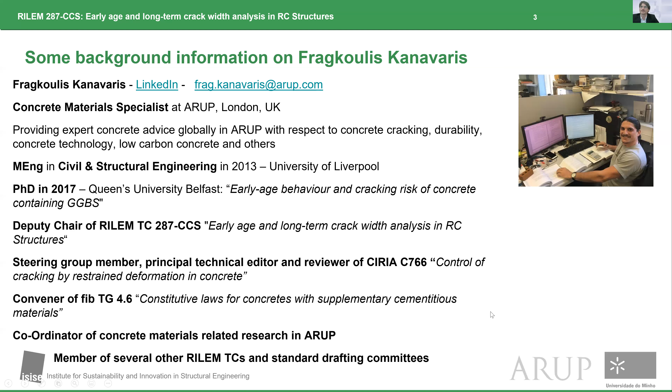We all know that cement will have an exothermal hydration reaction, and it will generate an increase in temperatures within concrete. These temperatures will generate expansion, and this expansion will cause stresses, even if not externally restrained - internal restraints will take care of that. So this is one complexity that we often not necessarily overlook, but simplify.

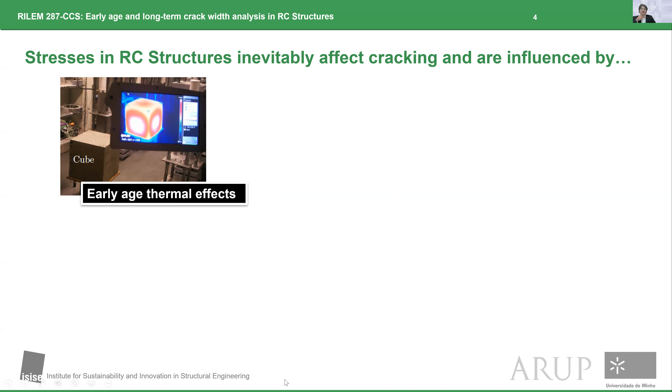Another complexity is the inherent non-uniform nature of drying shrinkage. So concrete, as it starts to dry, there will be an evaporation process from the actual concrete towards the environment. This drying is progressive from the surface to inside, and this progression will clearly cause a non-uniform way of contracting for the concrete due to drying.

So it will cause internal stresses. These internal stresses are usually accounted for in a simplified manner, but they are complex, and these simplified manners may not always be up to the challenge of representing reality.

On top of that, we all know that concrete endures creep and relaxation, and deformations are affected by this phenomena, which are also responsible not only for widening cracks in the long run, but also for alleviating the restraint to deformation. So there are counteracting effects sometimes, and they are really complex.

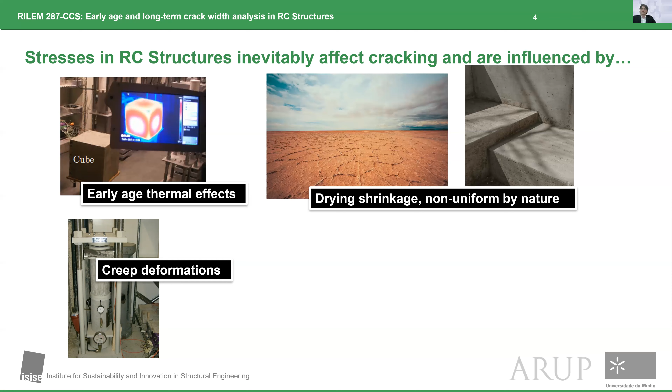They are time dependent. They are cumulative effects throughout time. They depend on the history, and the superposition of effects is often not applicable. So again, adding to the complexity.

Of course, in the middle of that, the applied loads, which are the classical things that we take into account in engineering for dozens or several decades, but they are there, and they can be really complex as well.

And finally, what I've been discussing and saying often, but now I explicitly mention it: the restraint to the imposed deformations in general. So these expansions and contractions due to the early age thermal effects, due to the drying shrinkage that is non-uniform, all this intricate stress development will have a conditioning factor on how the cracks arise, how the patterns arise.

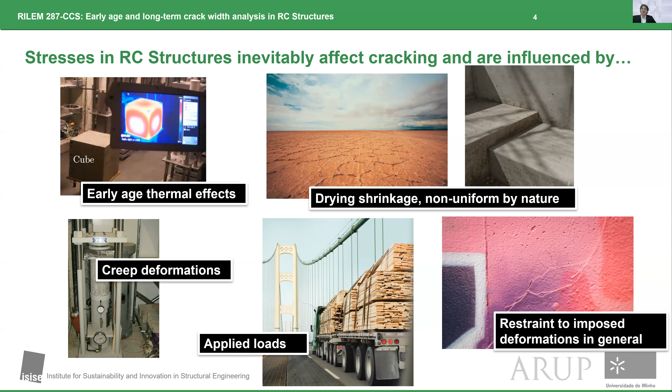So it's never a single effect or cause - we need to take this into account as a combination. And this combination is really hard to come by. So this is one of the things that we will be addressing when we discuss the goals of our technical committee.

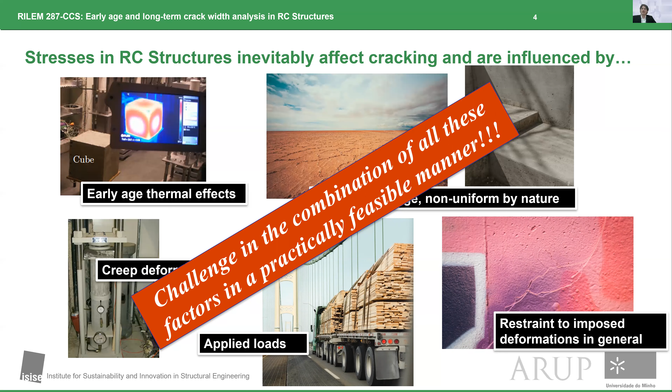So we have a legacy of a previous RILEM technical committee on thermal cracking, as I mentioned before. It was chaired by Eduardo Fairbairn, a very good friend from Brazil, and co-chaired by me. This was active between 2013 and 2019. It has 43 very active members.

We traveled a lot, much before COVID - really different reality. It seems like a lifetime ago anyway. We traveled a lot, we met very many times. We actually introduced for the first time the online meetings idea within RILEM, so when COVID came, we were already used to having Zoom meetings or video conference meetings. But anyway, it's not the same thing. We are really looking forward to getting out again, and we hope this will happen soon.

To stop speaking about the usual stuff, we made a very interesting book, in my opinion, and even though I'm very suspicious as an editor, those that find this topic interesting, I think they will find a lot of information. This book was about thermal cracking, but it was mostly about thermal cracking avoidance - it was not actually much about the actual prediction of the thermal crack width.

So this will be the subject matter of the next TC that we are now chairing. However, at the end of this RILEM TC, not only did we create this book, but we also started a very interesting document, the RILEM recommendations on thermo-chemo-mechanical modeling of massive concrete. This is aimed to provide guidelines to academics and designers on how to choose parameters and the type of modeling for simulating these complicated things in mass concrete.

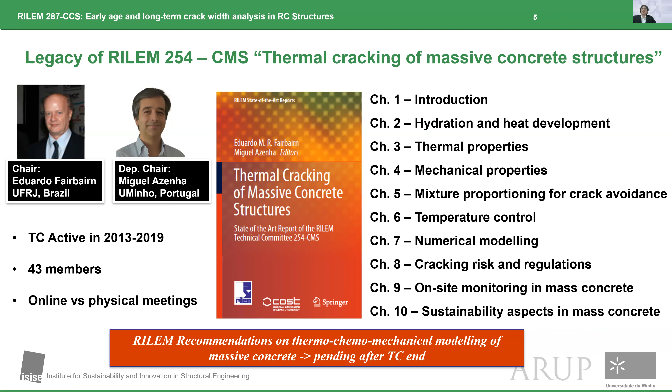The other thing I mentioned before was really important for the networking we were making, and it still echoes today: Cost Action TU1404. The website is still on, and there were several meetings and training events, which I'll speak about, as well as several short-term scientific missions. This is actually one of the ways I met Fragkoulis—he came to Portugal for a short mission as well. And there were many reverberations from it.

Its name was, as I mentioned before, 'Towards the Next Generation of Standards for Service Life of Cement-Based Materials and Structures.' We had the objective of contributing to the development of a new generation of guidelines and recommendations. Our methodology was to integrate recent developments in experimental and numerical approaches, with particular focus on the performance of concrete since early ages.

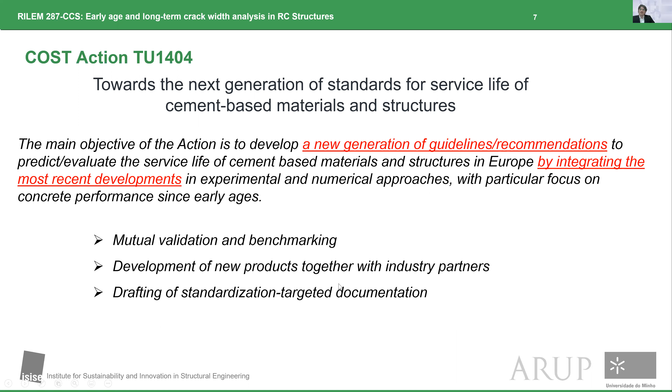We used three main sets of tools. First, mutual validation and benchmarking, both on the experimental and numerical side. We tried to promote the development of new products together with industry partners—trust me, this was really hard. And we tried to assist in the drafting of standardization-targeted documentation. We made pretty much progress on this, but much is still to be done, of course.

It's interesting to mention the three main focuses of the action. We had round robin testing—to our best knowledge, the biggest round robin testing in the world for concrete, sharing many tons of material. I'll give a number in one of the next slides. We made very careful protocols on how the testing should be done, and this was a legacy we're still using today, a reverberation—to get repeatable results between different labs, so we know we're discussing the same thing.

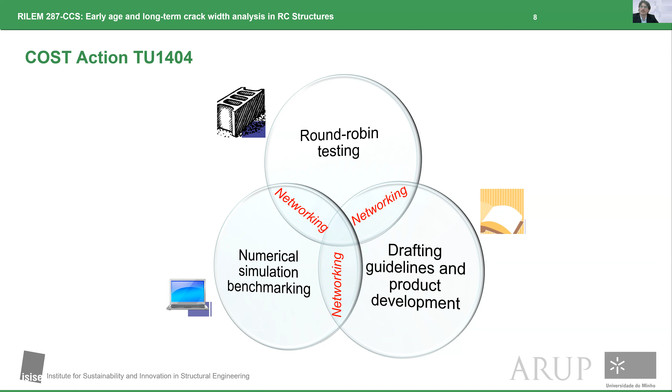We made several numerical simulation benchmarking efforts, where different experts from different parts of the world—not only Europe—tried to simulate the same thing and get somewhere. I'll speak about that as well. We also contributed a little to drafting guidelines and product development, but this was the least successful of the three. All of this was about networking, of course.

The round robin testing was, as I said, the largest so far as we know. We actually traveled 110 tons of material. This has a toll on sustainability, but it was definitely important to learn a lot from it. 43 laboratories were involved, and this document, already from 2016, was the protocol we created. It's available online on the TU1404 website—for laboratory protocols, we really think it's a very good document for concrete, mortar, and even cement-based materials.

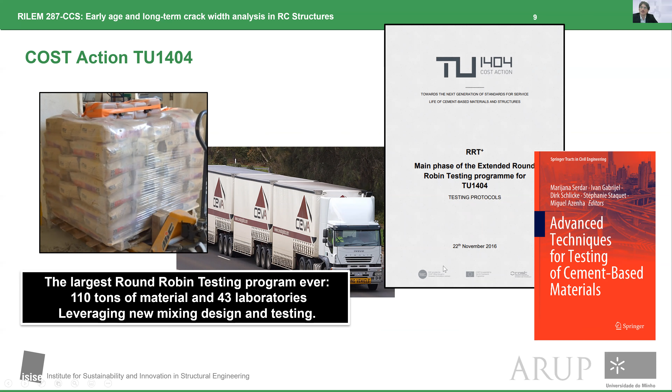We created several publications, one of those from Springer, but I'll keep going since that's not the main topic today. Of interest for today is that there was a very strong numerical benchmark activity among groups that were working separately, and we started joining our efforts to simulate the same thing with different models. Much of this was also related to the onset of cracking, or cracking itself.

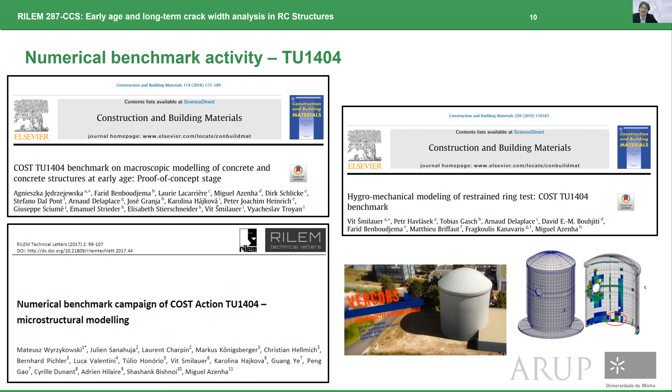We made a benchmarking on concrete structures at early age. We made a benchmarking about the ring test, an experiment that had been made in the round robin program. We made benchmarkings on microstructural modeling as well. And we contributed strongly to the benchmarking of the VERCORS benchmarking program from Électricité de France, EDF.

And then in 2017, also a very interesting doctoral school, actually by our friend at the time named Agnieszka Jędrzejewska, and she was the leader of such process. It was really nice to see the number of people that were there to learn about the modeling. The first one was about experiments and the second about modeling, but always with a similar focus, which was the reinforced concrete structures.

So the RILEM TC on early age and long-term crack width analysis in RC structures came along because of the insufficient maturity of currently existing practices for serviceability limit state design. In fact, we noticed that in many situations, and this is a practice we are noticing all along, there's an inadequate service life operation, even cracking, when codes are strictly followed. Not always, but there are many situations that are sort of unexplainable, and this goes against the predictability that we want from our codes.

Also, we are getting new materials every day. The challenges of sustainability to the world are getting stronger and stronger, and we have to cope with the capacity to bring these new materials to our concrete structures. As Fragkoulis was mentioning before, we have this challenge of supplementary cementitious materials, for example. We need new constitutive laws for them. We need to describe their behavior in a very smart way, but we are not able to do it. So how to tackle this challenge?

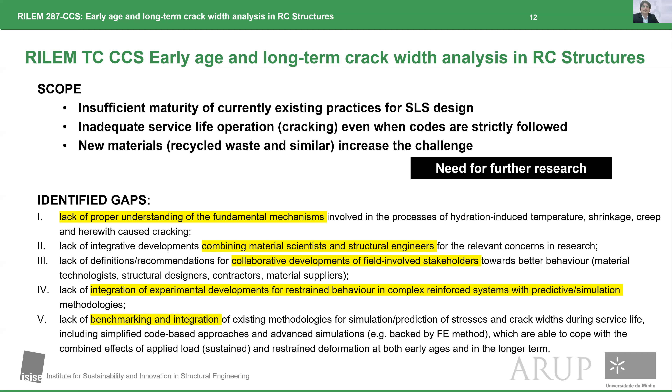This is really difficult, so we identified these gaps. They are again noted in the bottom part of the slide, but we started this TC and gathered a lot of people interested. So I now invite Fragkoulis. I will go to the next slide and you will take over the rest of the presentation. Thank you.

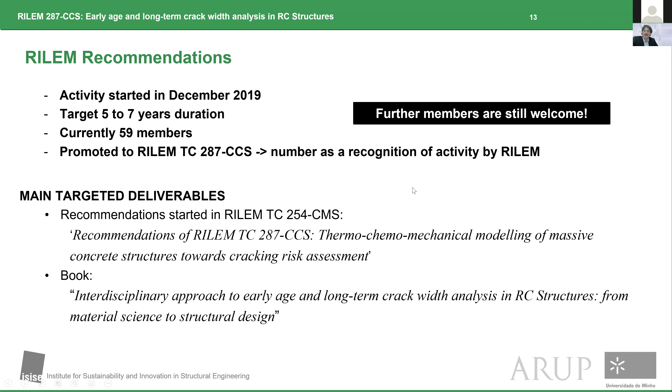Now we'll move to the next slide. So the first outcome of the committee was the publication of the recommendations document in Materials and Structures, RILEM's flagship journal, and this was completed in 2021.

It was a great milestone to see, because to our knowledge, there hasn't been a recommendations document as official as a RILEM recommendations document, solely on numerical aspects, particularly for thermo-chemo-mechanical modeling of massive concrete structures, but it could be for any concrete structure in particular.

We many times come across challenges that we don't know how to overcome: which model to use, what coefficient of thermal expansion to use, what should I do with the reinforcement, what is the thermal conductivity of this and that, what creep model I should be considering, and so on. Because we faced those problems during our development as crack control experts, we always wished for a document that would serve exactly that purpose, give us guidance on these aspects, and this is what this document is doing. I'm sure many of you will find it very useful, and it's also, I believe, open access.

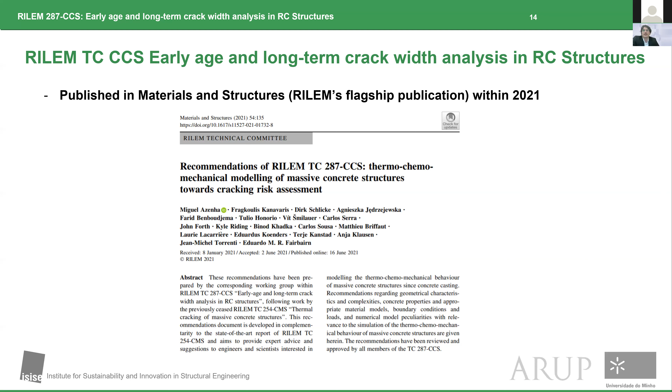Further on, sorry, I have some delay in changing the slides.

Okay, so in terms of meetings, we're an online-based committee given the current circumstances with COVID-19. That doesn't mean that the productivity of the committee has dropped; actually, it is very good. It is the social component that we miss.

But we have done already 5 meetings, and even this year we were able to organize a dedicated conference in the committee during the RILEM Spring Convention, where we have great participation of people from academia and industry expressing their views and their findings, research-wise and design-wise, on early age and long-term crack width control in reinforced concrete structures.

The proceedings of the conference are available through Springer and can be accessed. So that was another milestone for the technical committee, also very useful for us to perpetuate the pace we were having, and to shape the future of the committee research-wise, and what we should be targeting.

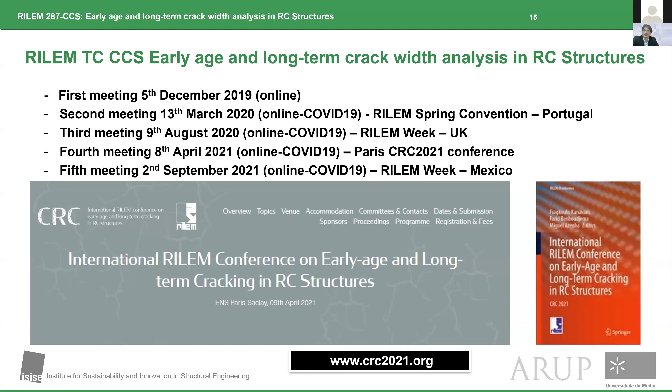So going into the specifics of the RILEM TC CCS, we essentially have now certain work packages which will be translated into book chapters, and all of them look at the distinct themes that are associated with cracking and crack control. I will go through them one by one as fast as I can, given the time limitations.

So initially, we start with an introduction and what is the cause of cracking and some terminology. Then we talk about experimental results in the laboratory. Then we move on for in situ evidence of cracking. We review the code-based approaches. We review the non-code-based approaches. We talk about

numerical simulations at multi-scales, and we challenge and critique the cracking performance requirements in different parts of the world. We review the materials techniques that can be employed to improve cracking performance and cracking resistance. And we also explore the integrated measures on the supply chain towards better cracking performance overall.

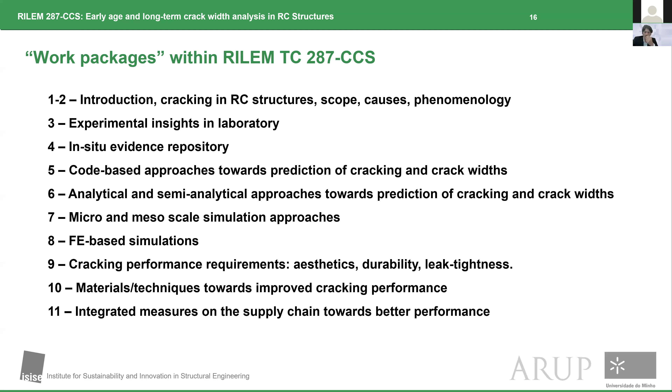So I will go one by one and try to describe the scope of each work package, and perhaps accentuate the importance of each one of them.

So in terms of relevance and phenomenology, which is the first two work packages of the RILEM TC CCS, we do know, as Miguel said previously, that cracking occurs due to several reasons. But in this case, we are particularly interested in restrained imposed deformations, which is relevant to SLS cracking. This can be due to heat of hydration, long-term temperature changes, drying and autogenous shrinkage and creep, and also the effects of restraints themselves.

These are often, or most of the time, superimposed with loads, so we have load-induced cracking also. The particular focus of the TC is how to calculate and how to control the crack widths on site. So we want to combine these two effects that traditionally have been treated differently and separately, throughout the life of the concrete since the beginning, since casting. So the time scales are from early ages till the end of service life, and that encompasses all the different mechanisms and phenomena associated with cracking.

Now, at this point, we are excluding several phenomena that lead to cracking: particular loading situations related to fire and cryogenic temperatures, extreme loading due to earthquake or impact and blasting and fatigue, any deleterious swelling reactions like ASR and delayed ettringite formation, or rebar corrosion, and cracking that occurs before setting or at the time of setting, while concrete is still probably a little bit more fluid, like plastic shrinkage, plastic settlement, and crazing. This is because there are fundamental differences between the cracking mechanisms and drivers for cracking between the imposed deformations and load-induced cracking versus the aforementioned phenomena.

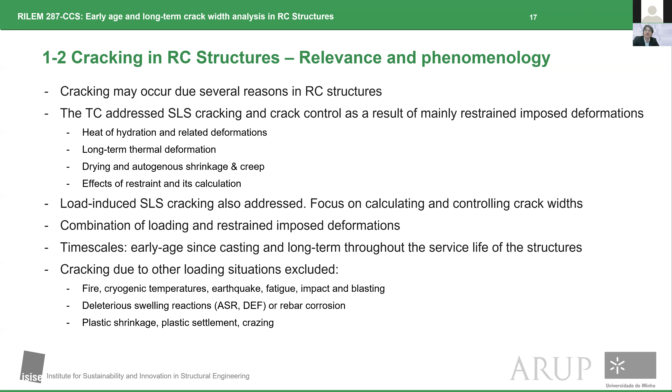So on laboratory scale, there is a lot to investigate, and there are several techniques and methods that can be employed to obtain information regarding the cracking characteristics of concrete, particularly restrained cracking characteristics. The aim of this work package is to review which experimental technique provides which information relevant to cracking, what are the limitations, and which one to employ given the specifics of a particular situation - time, cost, possibly availability of equipment, ease of construction, and so on - and what we should be expecting out of these experimental techniques. We also cover how to actually measure cracking, and with what sort of technique.

Is it a surface-mounted transducer? Can we employ wave propagation methods, or even microscopy, tomography, and CT scan, and so on? These are all relevant to cracking, crack propagation, and crack depth. We also cover tests due to applied load - the typical direct tension tests, or typical bending tests, or even cyclic loading.

And although I mentioned that we don't explicitly account for cracking due to durability mechanisms and chemical attack or rebar corrosion, for the test component we thought it would be particularly useful - because we cannot easily calculate and control cracking due to these mechanisms - to at least propose or look further into techniques to measure cracking due to these causes.

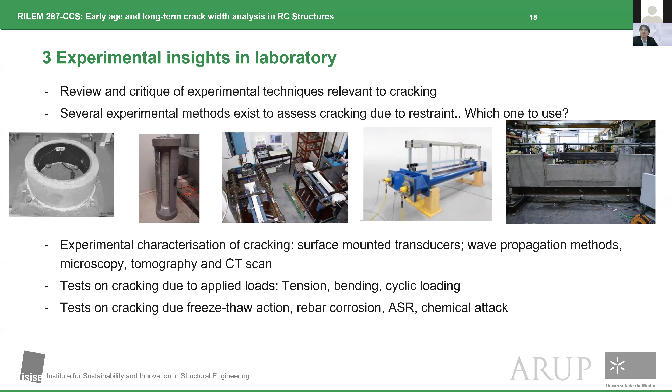Further on, the next work package is on in situ evidence repository, where we are attempting to compile evidence of cracking in several different types of structures, including restrained walls like tunnels, containment buildings, basements, foundation slabs. We come across them in warehouse slabs and other massive base slabs, suspended slabs, and any other massive concrete element. We cover a big breadth of structures: bridges, tunnels, buildings, nuclear structures, hydraulic structures requiring leak tightness, and so on.

But the fundamental requirement for an entry to this work package is that for each case, we should have a comprehensive set of data with respect to cracking and what caused it. So we have measured temperature histories, strain or stress histories, crack width measurements, casting and construction methodology, when cracking was first noticed, and the concrete mix characteristics.

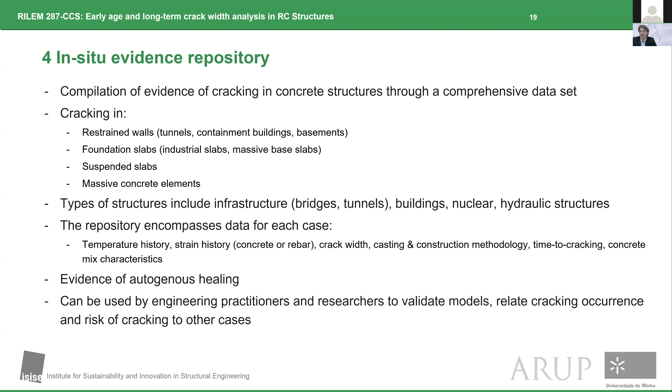And also we are attempting to cover evidence for autogenous healing as well. Ultimately, the main aim of this work package is to create a comprehensive database of evidence of cracking in actual structures where actual people designed them, and we have data about it. So we can back-calculate what went wrong, or we can even use the results to validate our models or our experiments.

Okay, further on, we're looking at quite an important aspect of this committee: how different regions in the world deal with the problem of crack control. We do know that there is no unified method to control cracks in concrete, at least not due to imposed deformation. Earlier this year, or the year before, we conducted a study within the committee, in collaboration with Arup, where we found that there are huge discrepancies between the rebar amounts required to control a certain crack width for a certain structural arrangement.

So as an example, if you have an edge restrained wall, how much reinforcement would you need to control the crack width to 0.3 millimeters, which is the typical crack width required by most codes. We investigated Eurocode 2, different CIRIA guidances, Australian standards, and German specific guidelines. You can see that for a given crack width, there are massive differences in estimates for rebar reinforcement required. This brings us to an uncomfortable position of not being able to reliably assess which code is correct, more accurate, or more reliable.

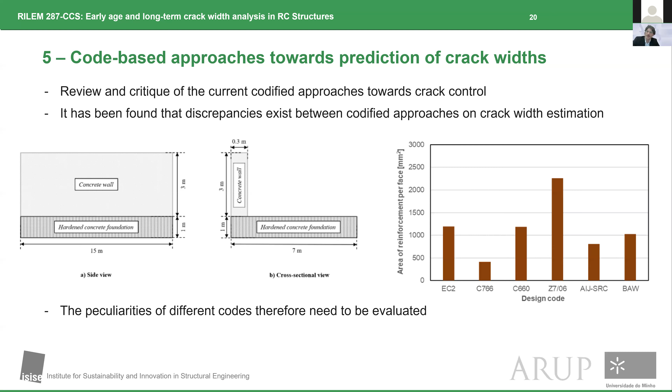And we're not in the position to understand why these codes behave so differently. So this work package aims to review all the different available codes with respect to crack control, but also comprehend in depth the reasons for the discrepancies between the different codes. At the moment, we have collected information regarding codes dealing with crack control from different countries around the world. We have great participation from actually all continents, I would say, and this is still growing.

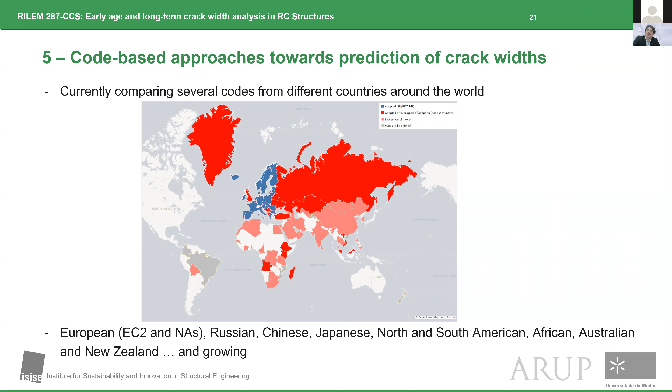This world map is currently being updated. We have entries for North American standards, entries for Australian standards. The list is really growing, and I think it will be a very meaningful output once we manage to get all the specifics of the code-based approaches. But apart from the code-based approaches, there are certain non-standardized approaches, analytical and semi-analytical, that can be used to calculate crack widths and control cracks in concrete.

These may be a little more advanced than the traditional ones, but there's still very much merit in looking at them closely and comparing how these methods perform against the code-based approaches, and against either experimental results or cases where cracking occurred, as I mentioned previously regarding the in situ evidence repository. So all this evidence for cracking will be used in conjunction with these techniques to assess their differences and their applicability to crack control.

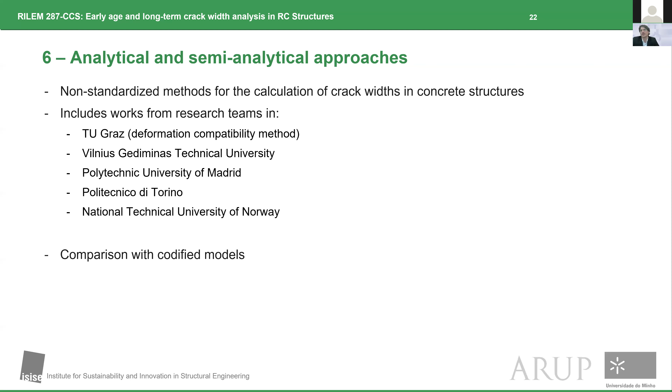We also have a lot of participants in this work package, mainly from different European countries predominantly, and ultimately this will be compared with the accuracy of codified models. Further on, the next work package is number 7, a topic that hasn't received much attention from the wider engineering community with respect to crack control. This is because most of the models are macro scale, let's say, or many are models of something bigger scale, but micro and meso scale are still very useful.

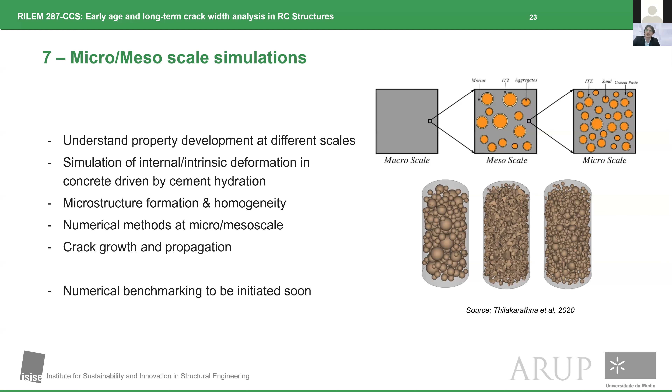They provide fundamental knowledge with respect to concrete property development, and can be used in conjunction with macro scale to feed the model. So upscaling the model from micro scale to macro scale can give us a very good view of how properties develop within concrete, what is happening with micro cracking. In this work package, we will also be reviewing the numerical methods used at the micro and meso scale, and establish a numerical benchmark based on certain cases modeled by the participants, then reach conclusions as to the peculiarities of each different model. After micro and meso scale, we move to macro scale or finite element-based simulations.

These are the most frequently employed types of simulation to model cracking, but still there are very complex processes associated with modeling cracking, especially at the multi-physics level. We combine different physics—thermal, chemical, hygral—to try and predict the behavior of concrete, but at the same time we want to predict cracking and see whether cracks can be controlled in numerical models, and what precautions should be made. This puts an emphasis on how to model the actual mechanisms, like constitutive modeling, hydration, drying, shrinkage, and creep, and also how to model cracking more reliably for a specific case.

Again, we will set up a numerical benchmarking where different modeling approaches will be compared, based on past experience. This is very meaningful, not only to improve models, but also to improve our interpretation of the modeling results.

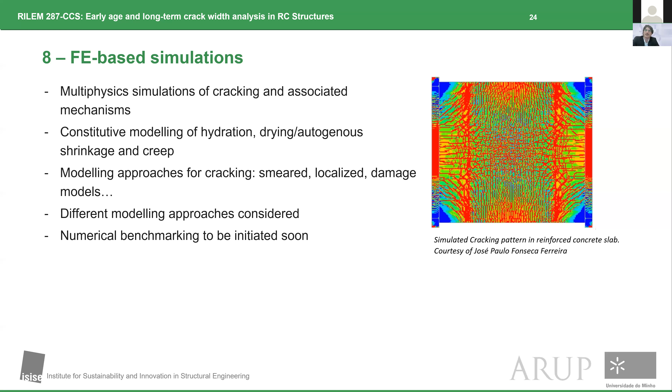Further on, we went on to challenge the current standards, but first reviewed the standards and what the cracking performance requirements are, predominantly for aesthetic durability and leak tightness. We review such requirements and assess the relevance of cracking to those requirements.

Another topic being addressed, very relevant to how we specify crack width limits, why we specify them, and whether it makes sense to specify them with relevance to durability, is how cracks actually affect durability.

Do cracks promote reinforcement corrosion? Do they accelerate corrosion propagation in the reinforcement? What happens in a carbonation-rich environment? What happens in a de-icing-rich environment and marine environments? All these peculiarities are reviewed.

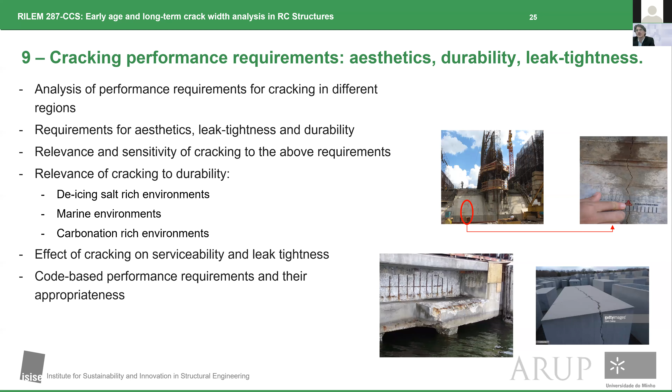We know these topics are still debatable, but we are hoping to shed some further light on it. And we compare what the code-based performance requirements are globally, at least for the guidance documents that we have in hand and were able to collect, and we will see how different regions deal with performance requirements for cracking in particular.

Further on, we are reviewing and providing suggestions regarding materials techniques toward improving the cracking performance. This refers to self-healing, or autogenous healing, or non-autogenous healing based on bacteria, how efficient that is, and what methods are there to apply this technique.

We have a section discussing the effects of fibers on improving cracking performance, how different fibers affect the cracking performance of concrete, and whether we can use any codified or analytical model to calculate the contribution of each fiber type towards crack control.

On top of that, we are looking into the efficacy of waterproofing admixtures in closing and healing cracks, and also further internal curing methods like employing super absorbent polymers, shrinkage reducing admixtures, and lightweight aggregates. Finally, we give insight on different repair methods, where they should be applied, and their efficiency towards cracking performance and improving leak tightness, for example, or crack bridging and providing load transfer through the cracks.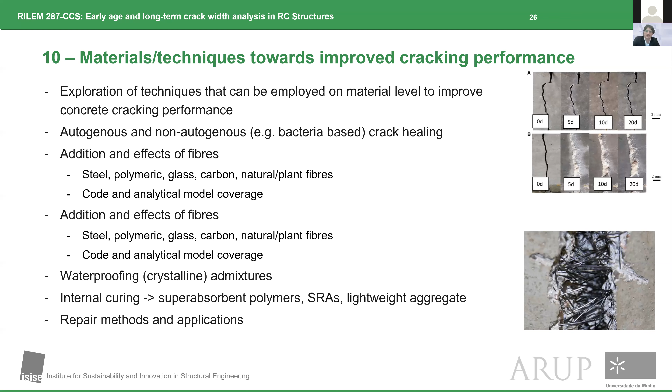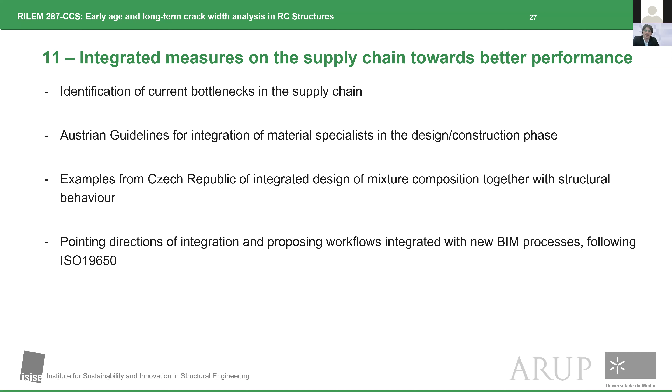So hopefully I didn't overrun much.

As a closing remark, both me and Miguel would like to share our final thoughts. Much is known, but much is yet to be learned, and every day for us is a new learning experience. So this is a call for action—please join us in RILEM, and let us learn together and progress the knowledge on cracking further on.

Thank you. Okay, thank you. And I guess that wraps it. Thank you. Thank you.